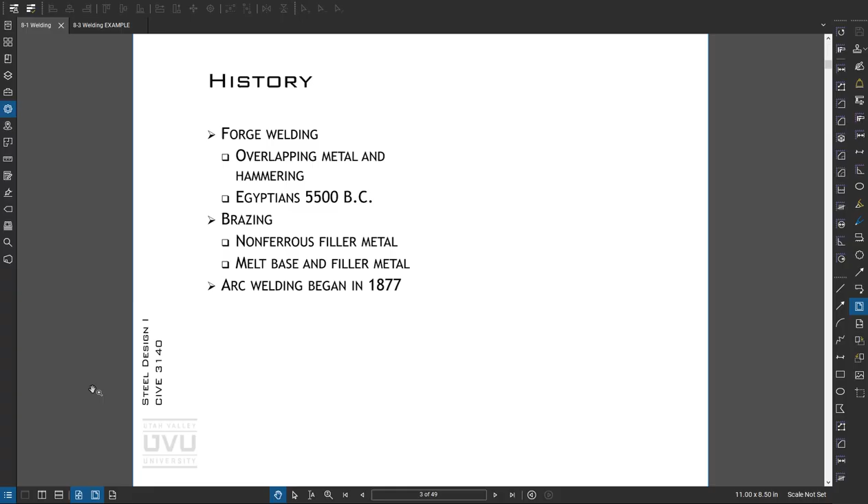A little history on welding. You probably get more information from Google. Let's go through different types of welding methods quickly.

Shielded metal arc basically means there's some kind of flux, metal, and an arc between the base metal. There's some kind of welding machine which connects to the electrode and to a ground, so current flows one of these directions, and then there's some kind of joint prep.

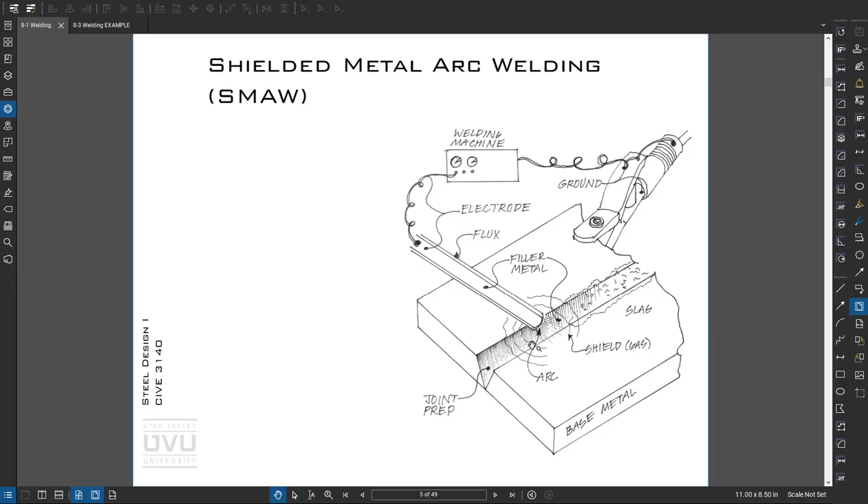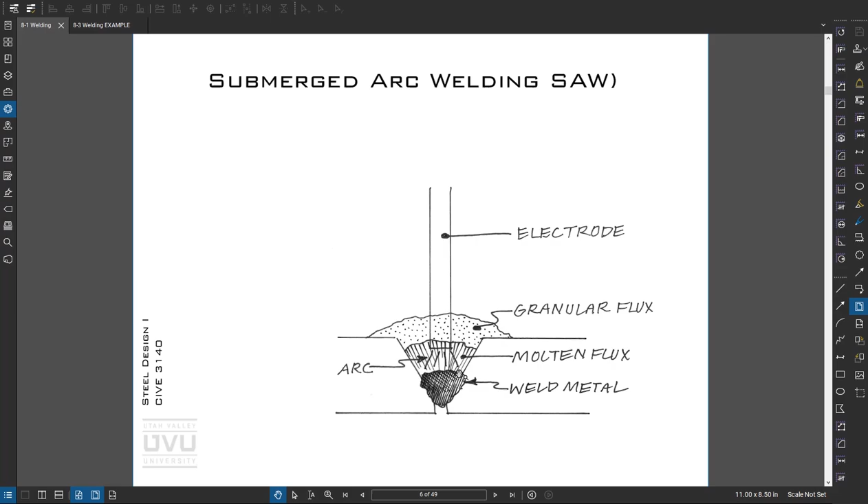For submerged arc welding, we'd have some kind of flux, a bare electrode, and an arc. When this arc happens, it melts the flux, creating a molten flux that protects the molten metal from oxygen. If it touches oxygen, the metal reacts and corrodes, and that's what causes spattering in welds - that reaction of the molten metal with the atmosphere.

Gas metal arc - there's a gas, so there'd be a nozzle with gas around it, and an arc in the base metal. The gas creates the protective shield. Gas metal arc is great in the shop, but in the field it gets difficult because it doesn't take a ton of wind to remove that gas shielding.

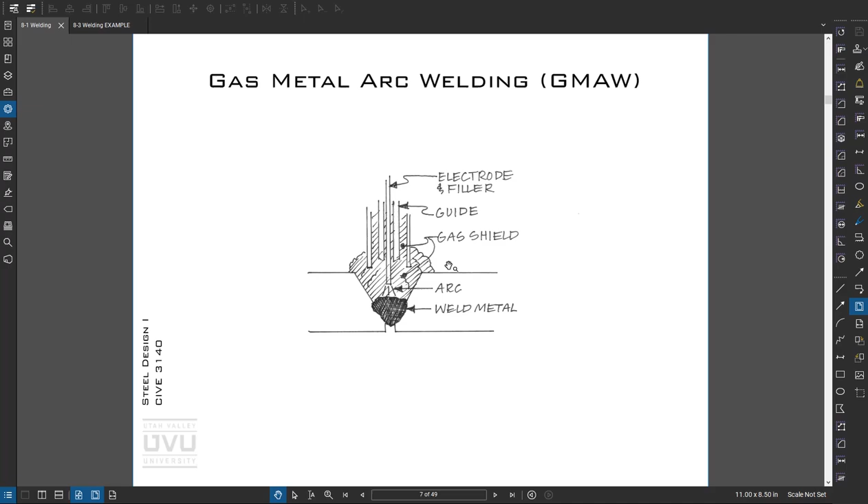Flux core is another type where there's flux inside the welding wire, and that burns. As it burns, the metal gets deposited, the burning flux creates gas, and you get protection of the weld. That's very common outdoors because you don't have to have gas bottles, but again it's subject to the same problem with weather, particularly wind.

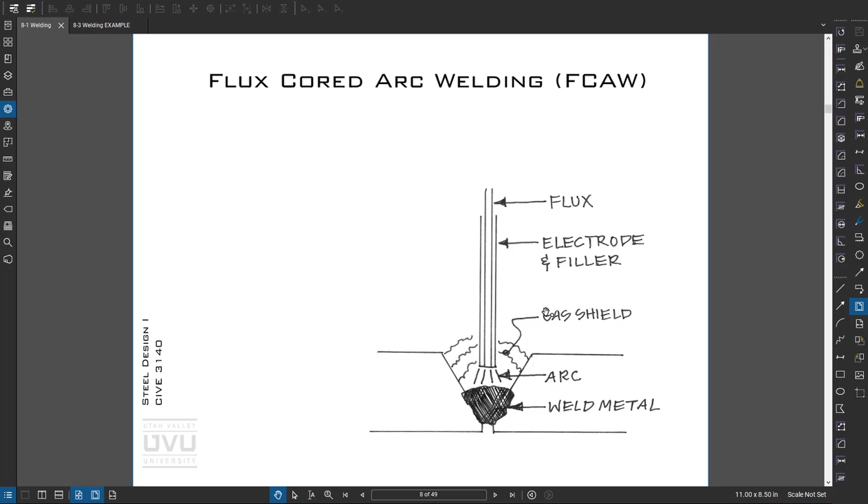Electroslag is another method which you tend to see in shops. As you're beginning a project, it's important to understand the weldability of the steel. If we're using common structural materials like A36 or A992, it really doesn't take any thought because those are weldable - made to be weldable.

Sometimes when we get into older steels like this head frame here - this is down at a mine in New Mexico, we were doing some repairs - one of the first things we did was take a test coupon out of an area that wasn't highly stressed, sent it to the lab, and received what's called a carbon equivalent, which tells you, based on the different alloying elements, how weldable the steel is.

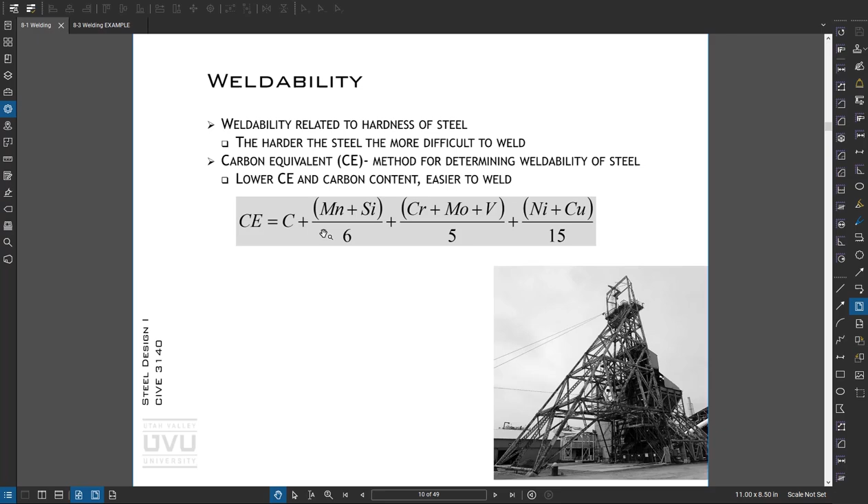So we can use this type of table to understand the weldability of the material.

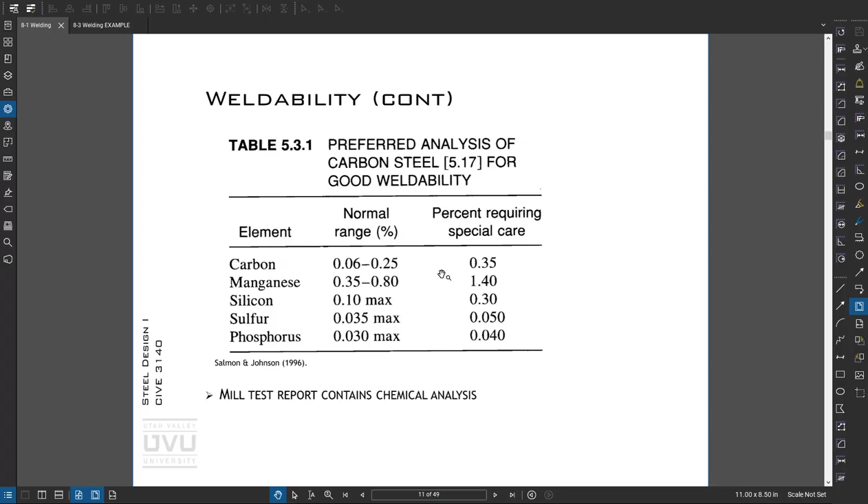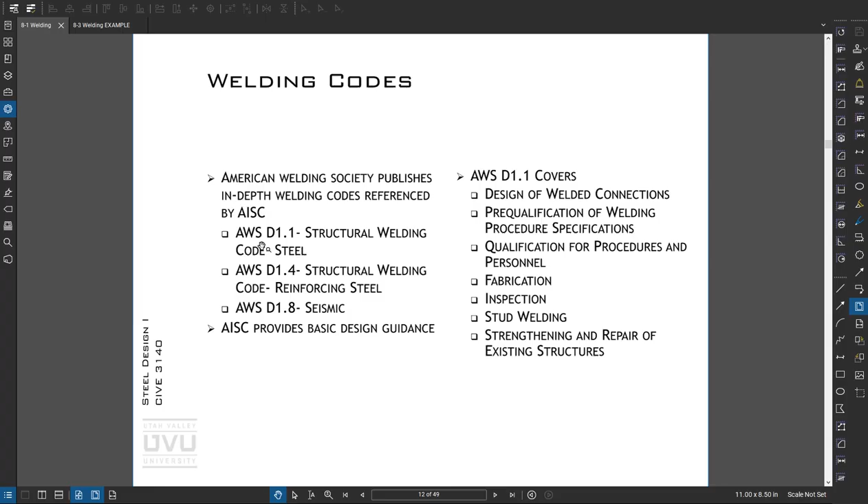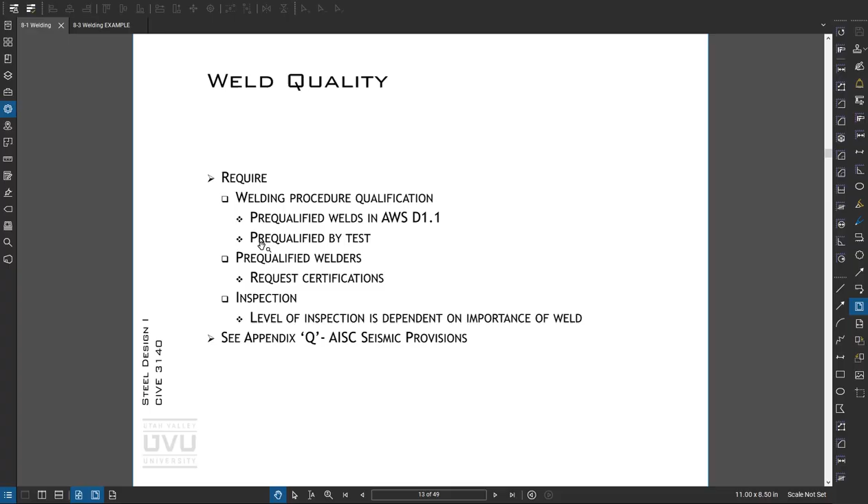Different welding codes: D1.1 is the primary structural code. D1.4 gives guidance on welding reinforcing steel, and D1.8 is seismic. There's also a bridge welding code. American Welding Society is what AISC defaults to for the very nuanced specifics of welding. There's also weld quality requirements in D1.1, D1.8, D1.4, and different types of inspections.

It's important to understand the different ways welding can not be great. Briefly: no fusion, where the weld didn't get hot enough - usually caused by poor welding technique and poor settings on the machine. Gas bubbles tend to not be the biggest deal because they're rounder than, say, cracks, but we don't want them in there. Cracking obviously carries no load.

An undercut is where there isn't enough weld metal deposited. Slag inclusions, and then lack of penetration, where to fix this you come back and gouge out or grind out the backside and then fill it back up.

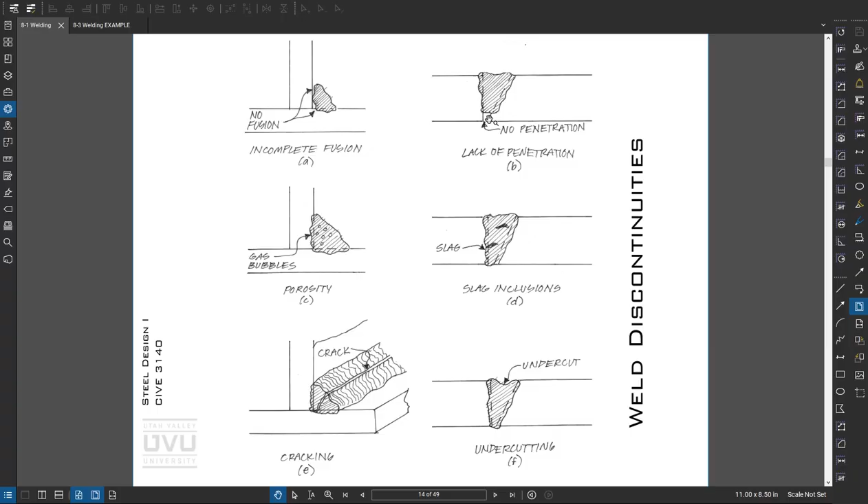Inspection - there's 7 requirements for any inspection program. If this happens to be a direction your life takes you, you need to tell someone what to look for, when, how, where, how often, what the threshold of detection is, and probability of detection.

Non-destructive testing finds problems without destroying the material, which is extremely valuable. This here is a magnetic particle test - this device in this fellow's left hand creates a magnetic field. This sprays very fine iron filings, and if there's any cracks or discontinuities, those iron filings coalesce around the crack and basically show you the crack.

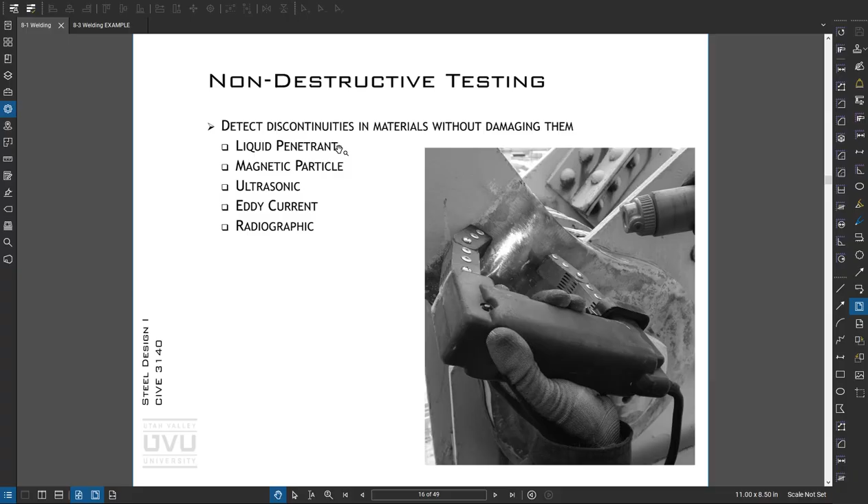Other types of testing: liquid penetrant finds surface cracking - you put a liquid on the part, wipe it off, and then with a black light you can see if there's any penetrant left over, seeped into cracks. Eddy current finds cracks near the surface. And if you want to go deeper, you can use ultrasonic or radiographic. This is an ultrasonic test here, where the inspector is looking inside of the part.

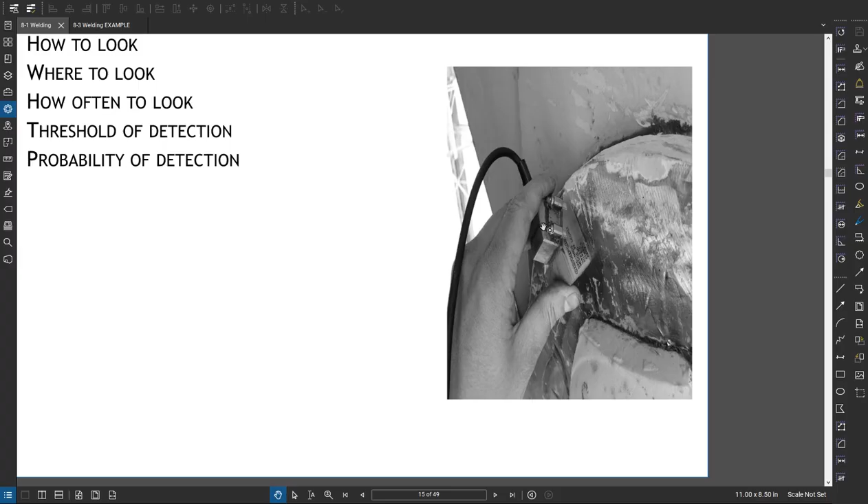Let's see if there's a machine and a screen connected to this, so it's kind of like looking at an ultrasound of a baby. It's hard to really tell what's going on unless you've been trained.

The threshold of detection here is important to understand. You can't find cracks under a certain size, and you can't find cracks over a certain size. If you look at these quarter-inch maximum size, those are very visible, so it tends to be realistic to find them. Although if you're looking inside, anything over a quarter inch, you're not going to be able to see with ultrasonic.

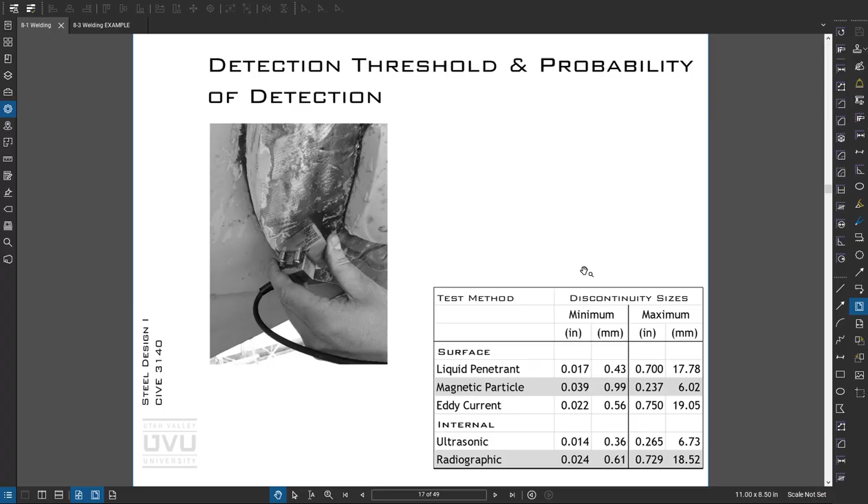Residual stresses occur as the weld shrinks at different rates, or the base metal is cool and the weld metal is molten. As the weld shrinks, it creates residual stresses.

There's a British standard 7910, which will give you the ability to calculate those. API, the American Petroleum Institute, allows you to relax those stresses. British standard 7910 does not.

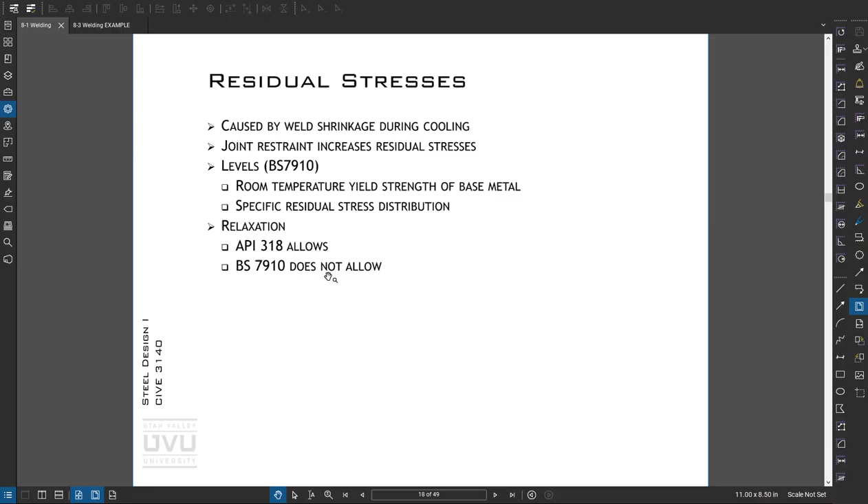Constraint is kind of key here. Constraint produces a triaxial state of stress, so tension stress in three directions. This reduces the ability for plastic flow. Plastic flow occurs due to shear stress, and less plastic flow means less toughness.

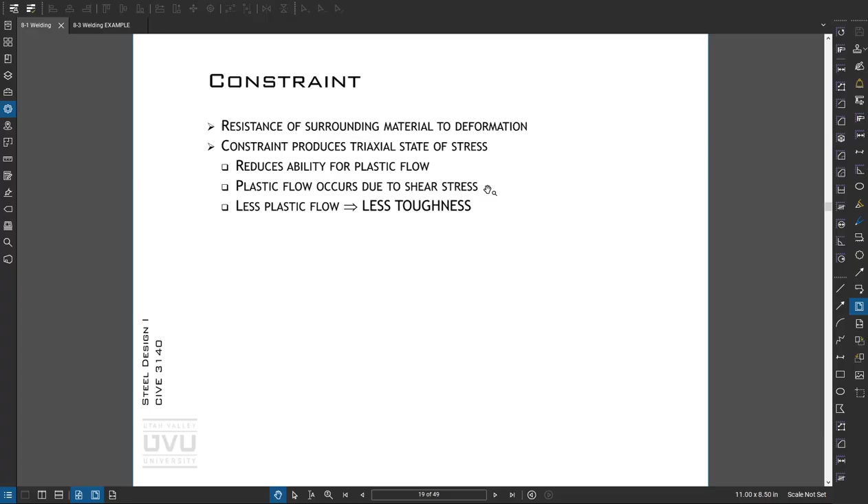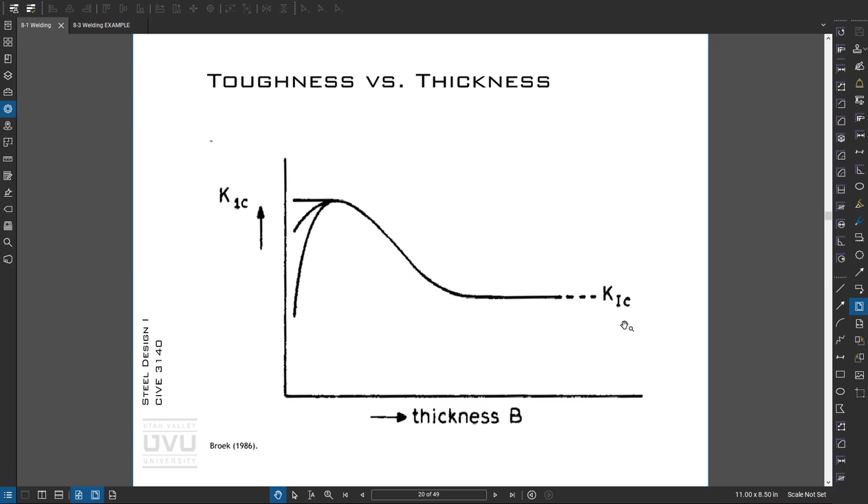A little bit on joint types. There's different ways the joints are configured. Butt joints are common in splices. T-joints are common when things come together. Lap joints have their place.

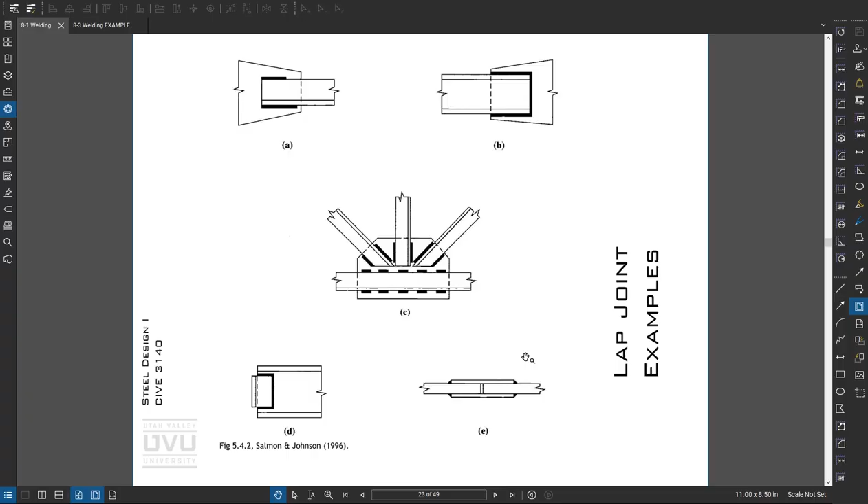Here's a joint in a truss, and there are lots of different ways to do it. The key is thinking about the people building it and configuring the joints in a way that's helpful to them. We can calculate things pretty easily, but as we design joints, welds, and bolted connections, thinking about how this gets machined, welded together, or bolted in the field really makes for better connections if we're thinking with the builders in mind.

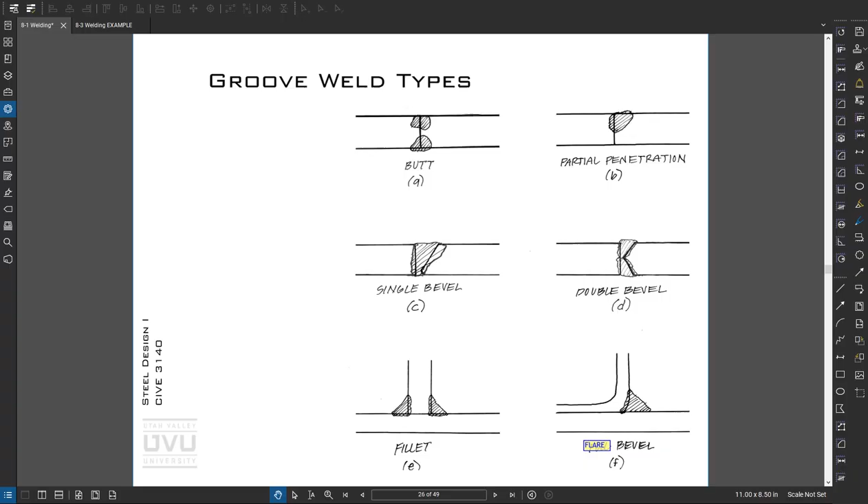Different welding positions: the flat position is ideal because the weld metal, when molten, just flows down into the joint. Horizontal and vertical are the next preferred and can be somewhat challenging. Overhead can be quite challenging because molten metal tends to drop out of welds overhead. In this case, there are special electrodes we can use that are more friendly to overhead welding. But as we consider the joints we're designing, it's important to consider what we're asking people either in the shop or the field to do.

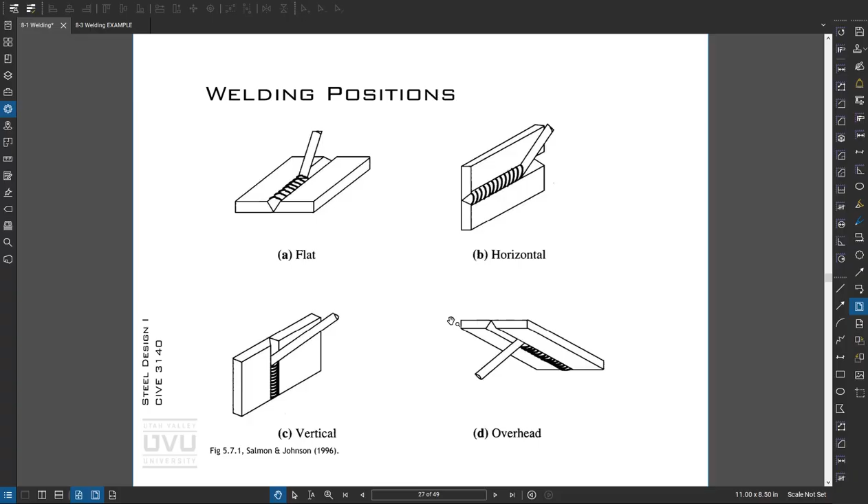Okay, weld symbols. This gives you kind of an idea of everything that goes into a symbol. It can be fairly complicated, but let's just take it step by step.

So this arrow points to this. This is the near side of the joint. This is the far side of the joint. So the near side info is on the bottom, the far side info is on the top.

If we want the same weld on both sides, we don't need to fill out the far side. Some engineers will fill out both, but to me that's just duplicating information if it's identical. Now if you want something different on the opposite side, then sure, by all means, fill this out.

However, if we have, in this case, a fillet weld on both sides, which is what this symbol means, and it's a 1/4 inch, all I have to do is put that here and life's good.

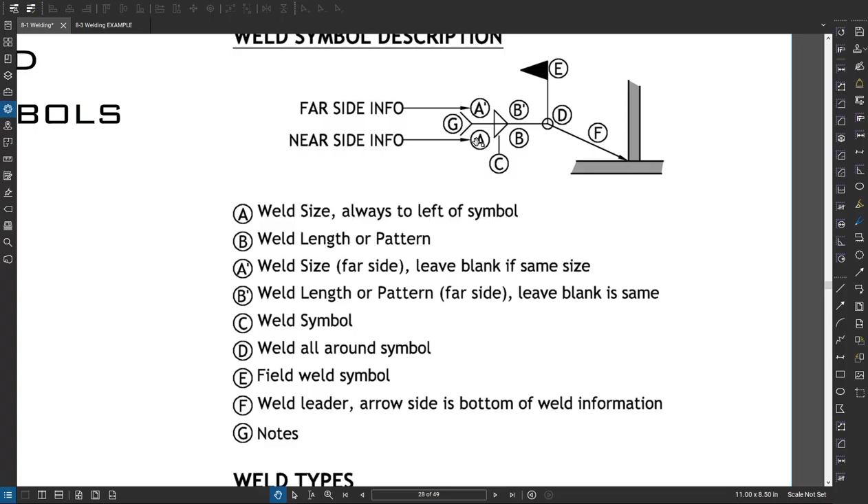All right, so A is the weld size. It's always to the left. If this were on the other side, this symbol wouldn't flip.

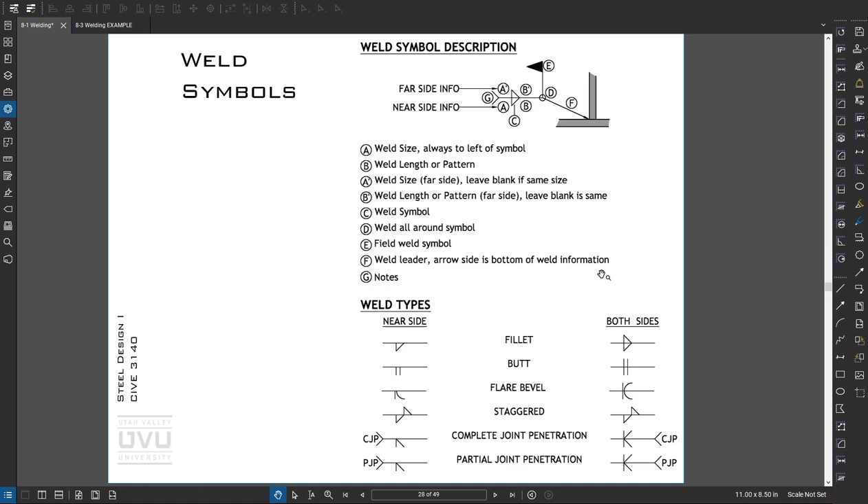You'll notice here this fillet has the vertical on the left, and on the other side - yeah, that does. So this would be the left side, the arrow would be here, and this would be the right side, the arrow would be here. You'll notice the symbol orientation stays the same between these - you don't mirror them.

Anyway, so weld size on the left, weld length or pattern. So maybe you have a 10-inch weld, you put that here, or maybe you want 6 inches every 12 inches, you would put 6-12 right here.

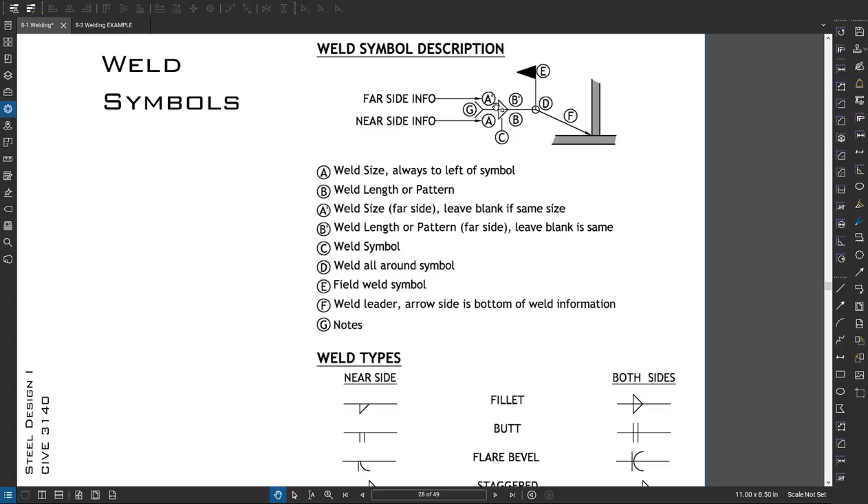Far side info, we talked about that. The weld symbol, what type of weld. And if you come down here, you can see the different weld symbols for the different types of welds.

D, weld all around. So sometimes like on a column base plate, we'll weld all around the column.

Field weld - we want to indicate welds we think are going to be done in the field. It's kind of a hint to the contractor that hey, this is a field weld, this is going to take some coordination. It doesn't have to be done in the field, and there may be shop welds that we specify that the erector and fabricator come to terms on about welding in the field.

I like to put a note in my general notes that says it's up to the general contractor to coordinate with the field erector and the fabricator what is field welded and what is shop welded, and I don't want to take responsibility for that. So I make sure they understand it's their problem.

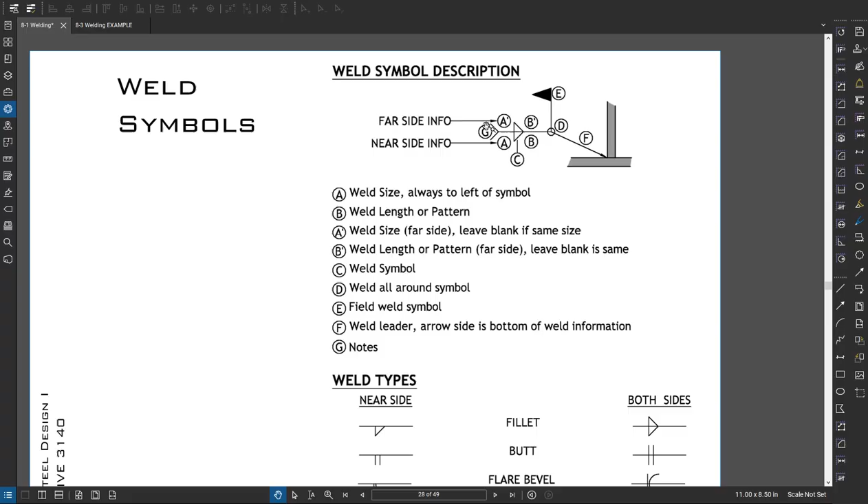And then the weld leader, and then on the left with this little caret are any notes. So if we come down here, we can see the different symbols. We kind of talked about that. And then more info from the code.

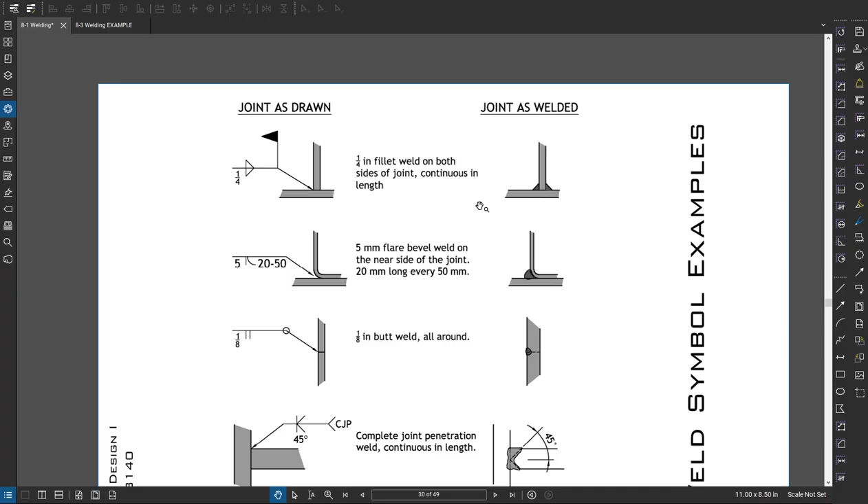So here, I have on the left the joint as drawn. So this would be what's shown in the drawing. In practice, that's what this means. So 1/4 inch double-sided fillet weld done in the field.

Here's in metric a 5 mm flare bevel weld where I want 20 millimeters of weld for every 50 millimeters. So that's what this looks like. And then if I looked at the side view of this, the weld would start and stop.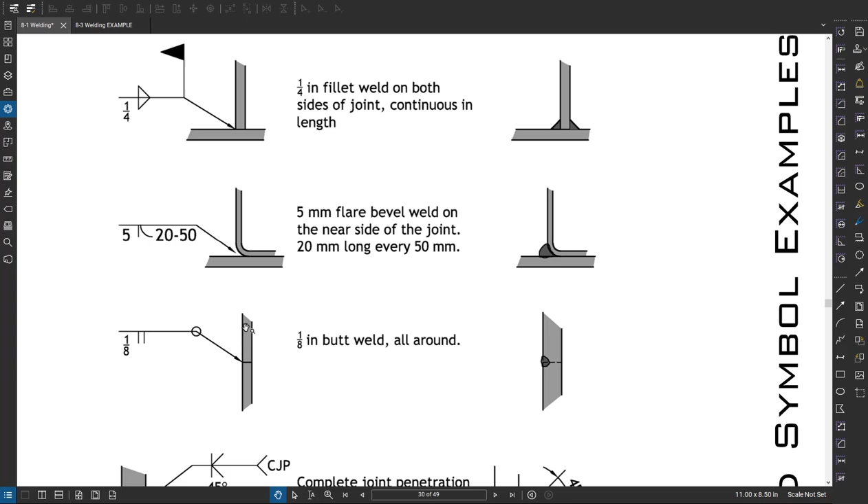Here's a 1/8 inch butt weld all around. So I'm saying this would be like, say, 2 pieces of pipe coming together. That butt weld would go around it.

Here I'm saying a complete joint pen, 45-degree joint prep, which generally I don't like to do, but a detailer would call this out. And then it's double-sided beveled. So that's what this is.

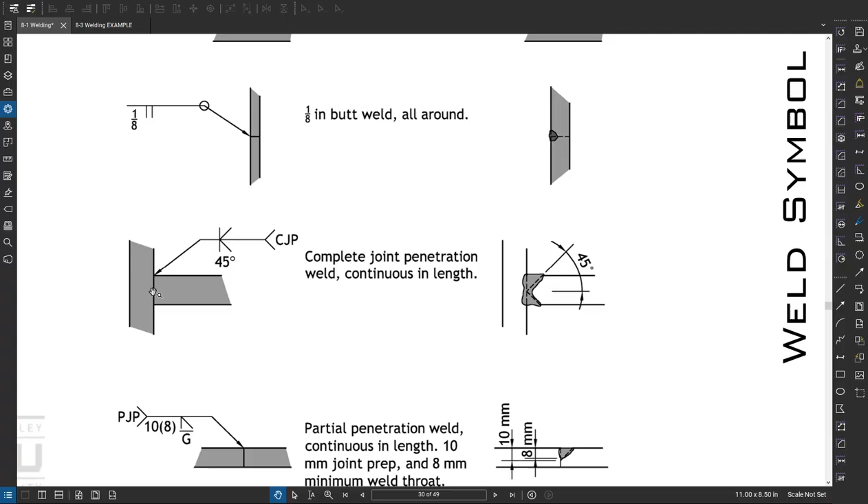Generally with CJP welds or PJP welds, I like to leave it up to the contractor or the fabricator to decide what their joint prep is like, because that will relate to their shop practice, and I like to leave that up to them. All right, here's a partial joint pen in metric where it has a flare bevel prep.

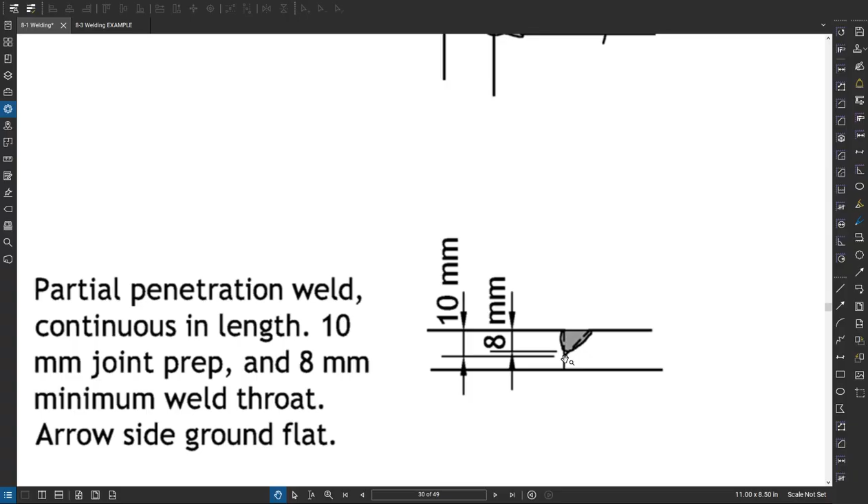The G stands for grinding it flush afterwards. The 10 is the joint depth, and the 8 in parentheses is how much actual weld metal or penetration there needs to be. It gets more complex than that. I like to keep the engineering callout simple and then allow the detailer to expand on these symbols based on shop practice and agreements or discussions they've had with the fabricator.